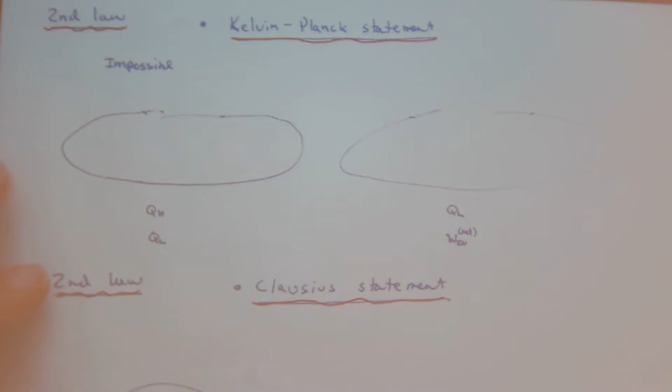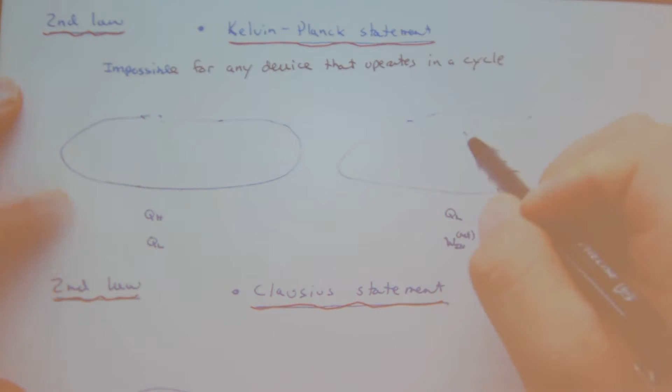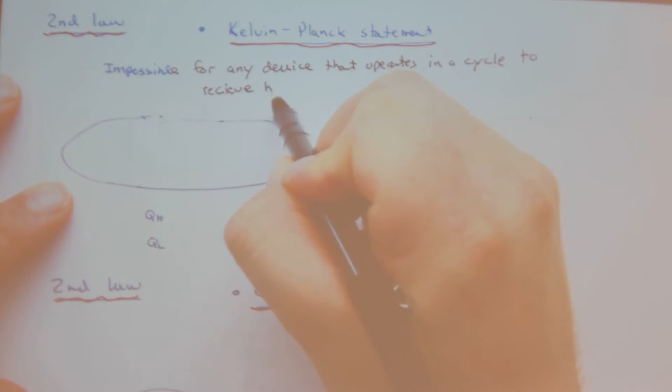So the Kelvin-Planck statement is: it's impossible for any device that operates in a cycle to reduce or receive heat from a single source and do work.

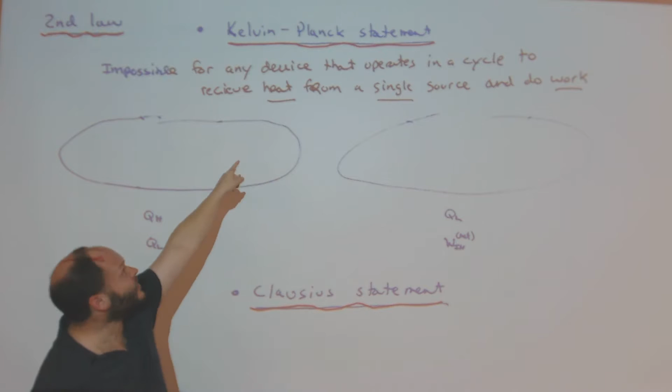So in all those schematics, we had a sink and a source, right? We just didn't have the volcano and then our system producing energy, right? We had to reject some of the heat. It's impossible. So in a couple other slides, we'll go to perpetual motion machines, where they'll show that there's not a sink and a source, so it's operating in a cycle. A lot of times people look at things and determine whether they violate the second law by using the Kelvin-Planck statement. This is just a very short version to show that the second law is certainly going to be violated because you're not removing heat and adding heat. So this is to do work, right?

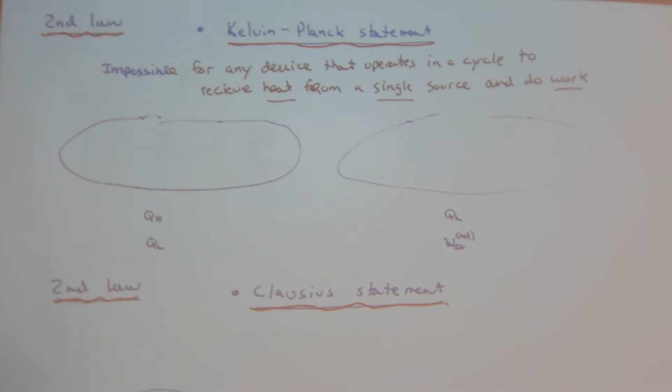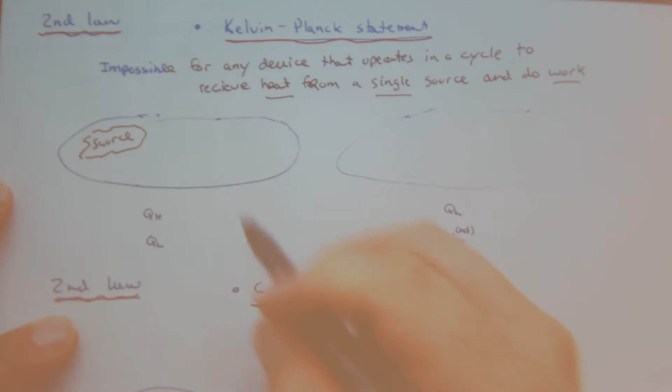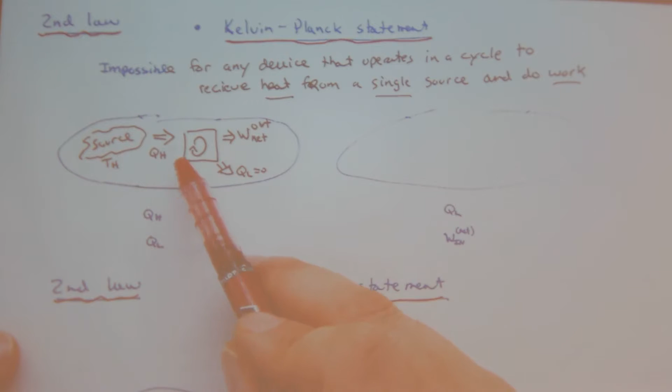So an example: I have a source which gives me QH, source at TH, and I have some system that's operating in a cycle, right? And my QL is equal to 0, and I have some work net out. This is a violation of the Kelvin-Planck statement because it's a device operating in a cycle where it's only receiving heat from one source and producing net work. So this doesn't work.

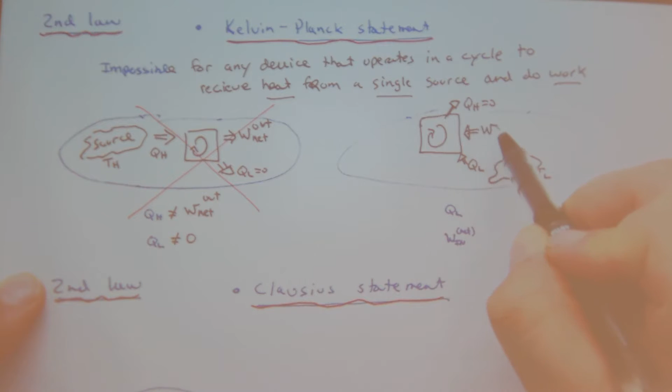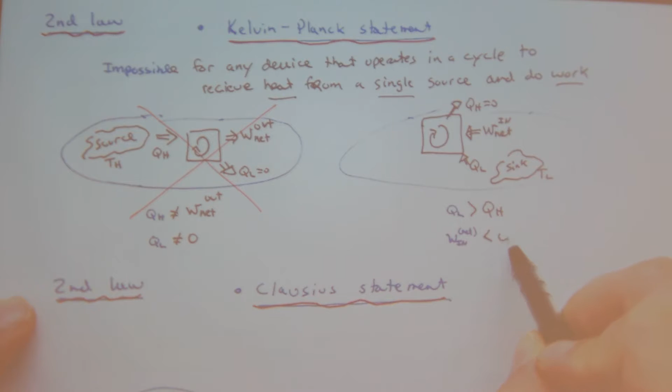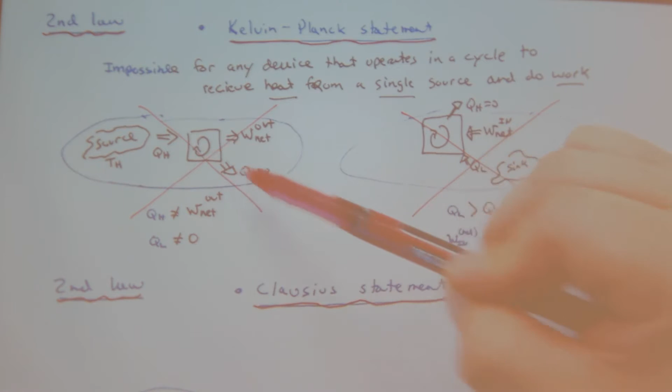So the Kelvin-Planck statement can be modified. Instead of it's not doing work, it's consuming work, but the same general terminology or concept applies. You can't just take heat from one source and not reject heat, or you can't just receive heat and not reject heat. So you have to have a sink and a source for any system to operate in a cycle.

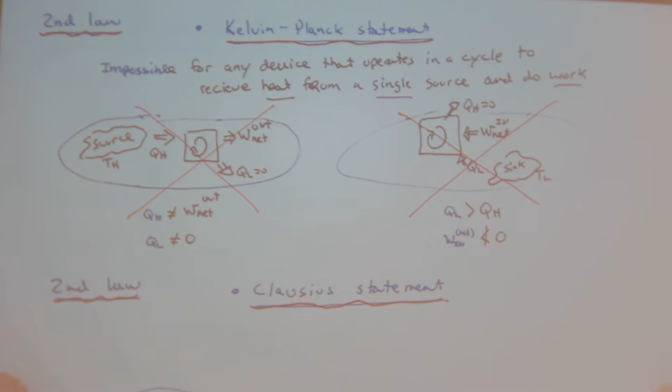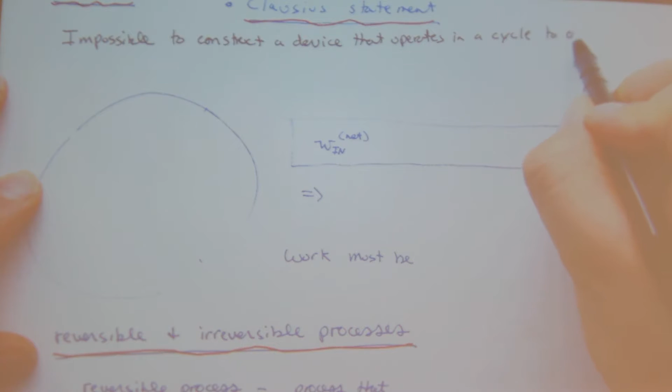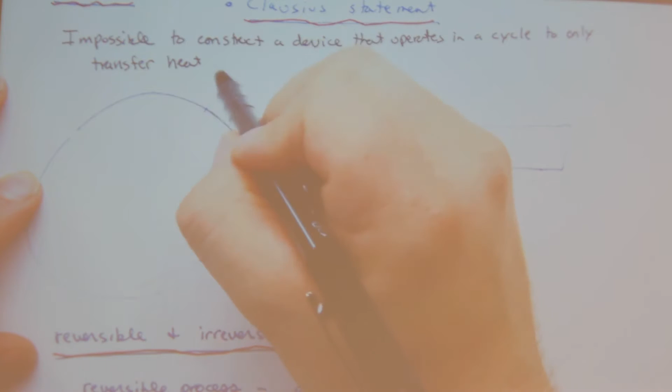So another example of a version of the violation of the second law is the Clausius statement, and the Clausius statement is: it's impossible to construct a device that operates in a cycle to only transfer heat from a lower temperature body to a higher temperature body.

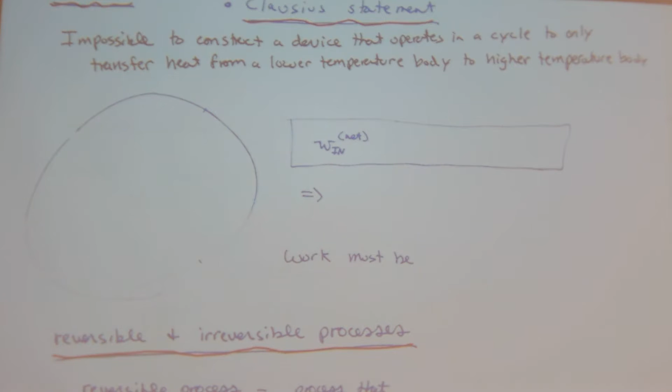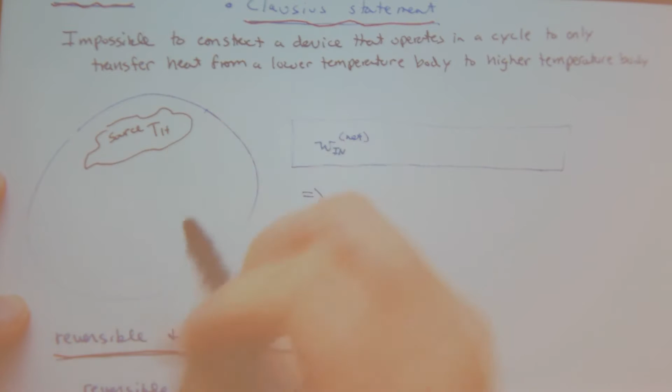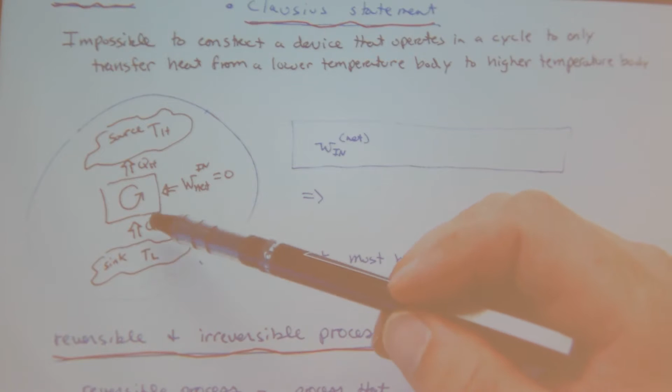So in this case, there's no work net in, right? Let's just draw an example of that. Source at TH, sink at TL. I have my system that's operating in a cycle, and I have my QL and my QH, and in this case my work net in is equal to 0. So here I've constructed a device that transfers heat from a lower temperature body, from my sink, to my source, without any energy input other than that.

So this would be - if you made such a device, we'd never have to worry about needing air conditioners, right? Because we won't need a traditional air conditioner, our house would just stay cool, right? We wouldn't need to plug them into the electric grid. We'd have this device that would just cool our house and reject to the Florida summer, right?

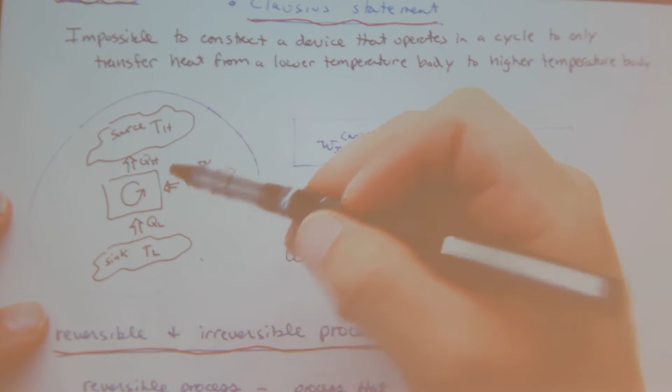So you have to have some work net in order for a refrigerator to work. And the reason for that is QH has to be greater than QL. So if we could find a way to make QL greater than QH, then this would work. But this doesn't happen. QH always has to be greater than QL.

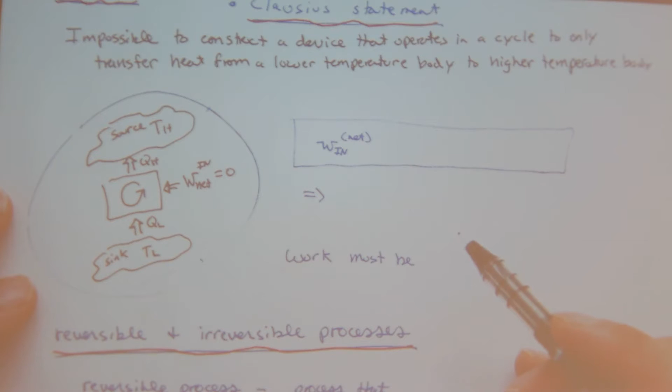Trying to think of an entropy reason as to why. So you remember the TDS statement, the TDS equation? So we can relate QH to delta S, right? TDS, right? Q, TDS equation. Q is equal to TDS, right? So here I would have a delta S associated with this, and here I would have a delta S associated with this.

And so if QH - let's just draw. Q is equal to TDS. So if I have QH and TH, so if I divide my QH by TH, I have a delta S. And if I were to do the same thing here, QL over TL, there would be a difference in delta S, in the change in entropy. And so from this example of the second law, you can show that QH has to be greater than QL because TL is less than TH.

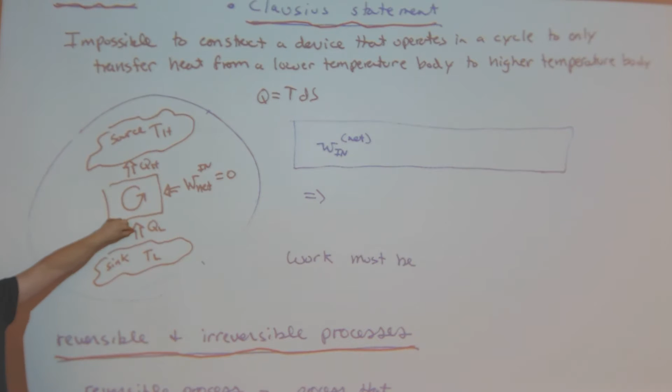Right? Because my delta S on both sides has to be equal. Otherwise, it can't be working in a cycle, because then my system would be constantly increasing in entropy. And at some point its entropy would increase and increase and increase, and then what?

Maybe that's not the best example, I just thought of it a second ago. But anyways, okay, so work net in has to be greater than 0. Not greater than or equal to 0, greater than 0. This must hold.

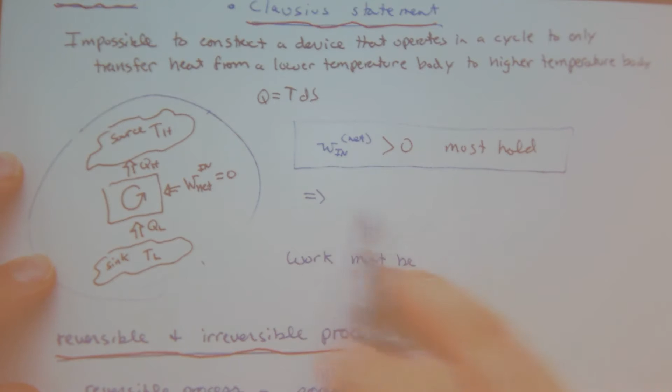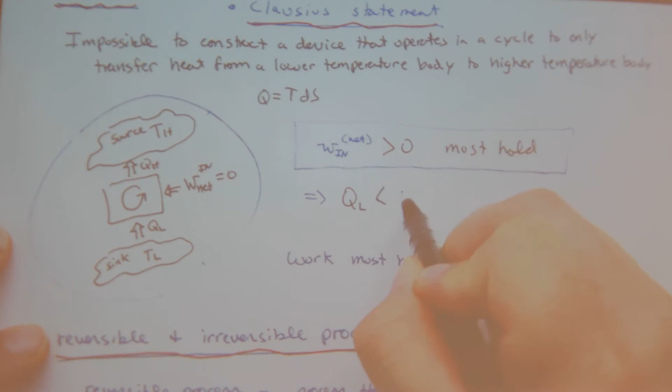So this is a shorthand version of the Clausius statement: in order for a refrigerator to work, you have to put work in. And still QL must be less than QH. This must hold too.

Or work must be done on the system by an external source.

So just some basic definitions. A reversible process is a process that can be reversed without leaving any effect on the surroundings.

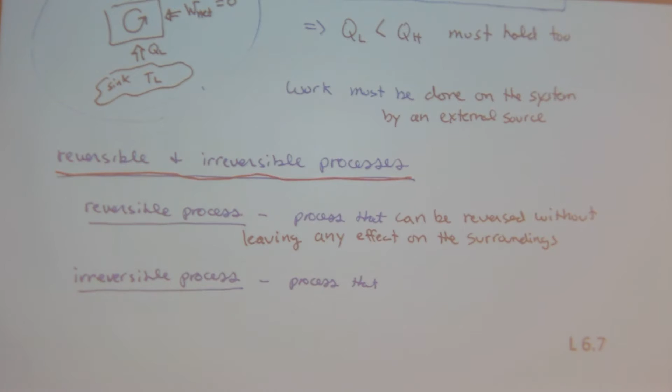So what would be... wouldn't anything have some heat loss? So wouldn't that always affect the surroundings?

Yeah, so this is kind of a hypothetical, right? Reversible process is more or less hypothetical. In principle, it can happen, right? You can have only reversible heat.

So let's just say I want to use a balloon... but maybe that's not the best one. If there's a balloon, well, that's not it. I'm trying to think of some way, but so we used that circuit example earlier on where we had a circuit and a battery, and then the battery got current running through it, which generated heat, which heated the gas surrounding it.

So if all that heat that went to the gas was reversible, then the gas could give back heat to the circuit and recharge the battery.

But of course, there's no such thing as that. Well, if we had it in a certain way, there's no way to make the heat charge a battery like that. But nevertheless, it's the fact that if I could give heat to the gas and the gas could give equal heat back, so it was all reversible heat, then if I asked every gas molecule, they wouldn't know that they had just received heat and gave it away.

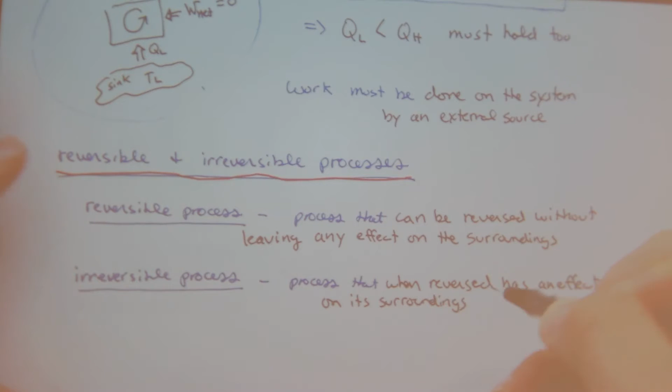So, me moving in this room, I can go from this state to this state and then come back again. The reality is, even though I come back and forth, I move the air molecules around. The air molecules know that I moved.

So if I add heat to a gas and then subtract the same amount of heat back, the gas is always going to know heat was added, even if I remove the exact amount, because it's going to be vibrating a little bit differently. I'm going to change the distribution of velocities in the gas. It might be at the same average temperature and pressure after, but it's going to know that something happened.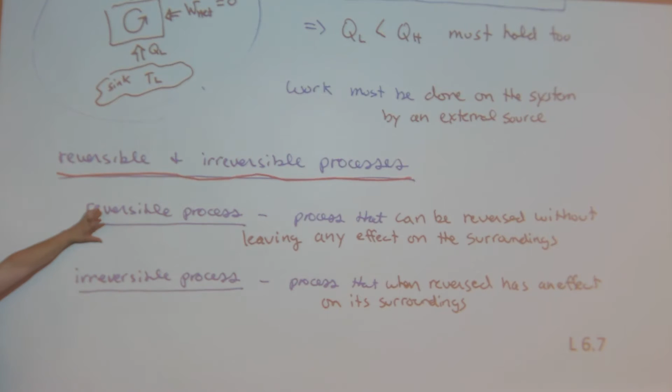And this is what happens in practice for any type of system or device you make. The goal as an engineer is to make it as reversible as possible, because when you make it as reversible as possible, you minimize the amount of irreversible heat, which means you minimize the effect on the surroundings.

So the last thing I want to do related to this is go over some examples of perpetual motion machines. These are in the back of the book, or in chapter 6. So here's an example of a perpetual motion machine where I have a pump.

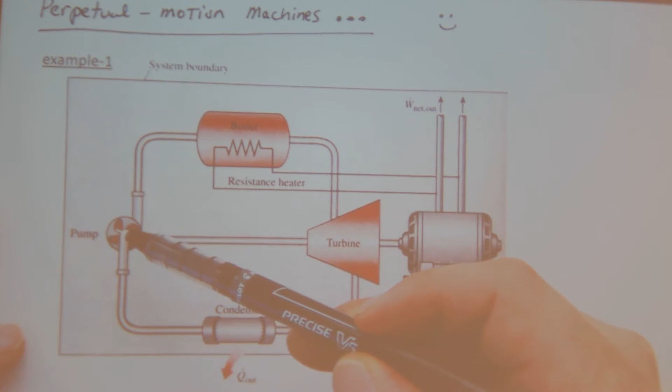You can see I have no work input to the pump. The pump is pumping, and the turbine is actually turning the pump. So my boundary, there's no external work input to this, but I have some work output.

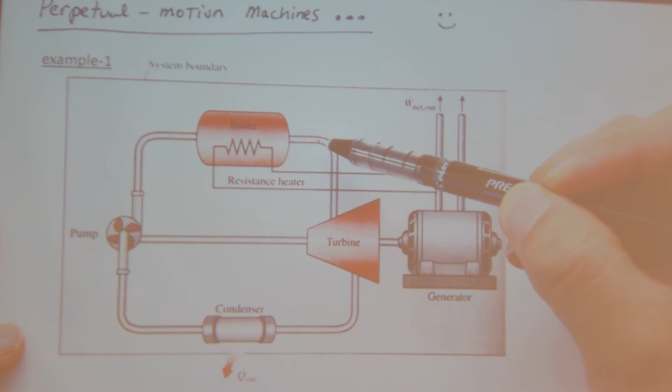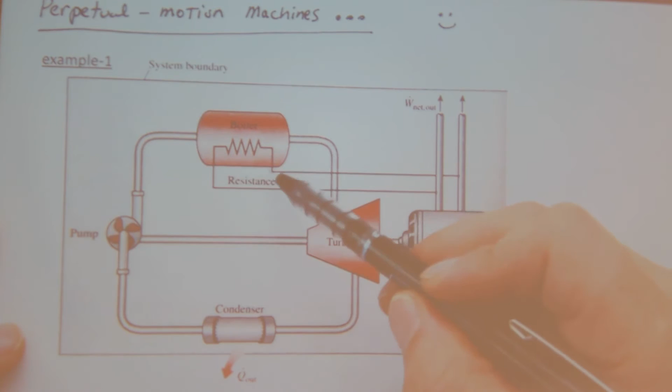There's a boiler, a resistive heater. I take in some liquid, high pressure liquid, still in the liquid state. I create it into a superheated vapor, a higher energy liquid, which then goes to the turbine. The turbine takes that higher energy fluid, reduces its energy, and gets a work output. Some of that work output from the turbine goes to the generator and to the pump, powering the pump. The generator then creates electric power, which powers the resistive heater through the boiler, and then the condenser just rejects heat out to my lake.

And so I have this thing which gives me a net work output by only rejecting heat to my low temperature source or sink.

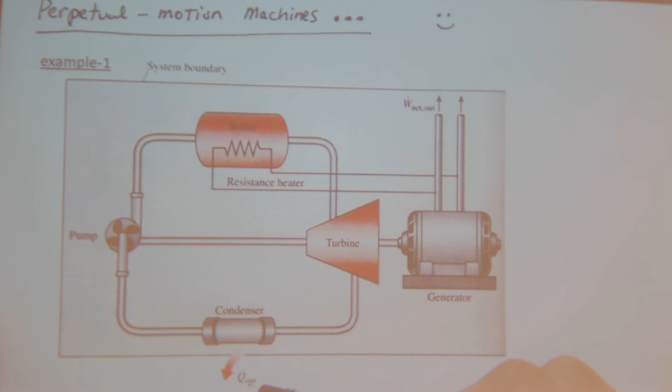So this is a violation of what statement? There's no heat in. So it's a violation of the Kelvin-Planck statement. You can have work out, so if this is net work out but there's no work in, I guess it's a violation of both statements. But in general, I need some heat from a high temperature source.

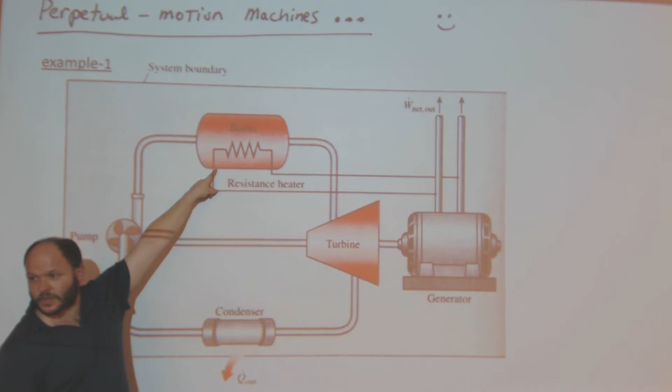So I need some heat input. And so what laws does it violate? Does it violate the first law? If I do an energy balance on this, it does?

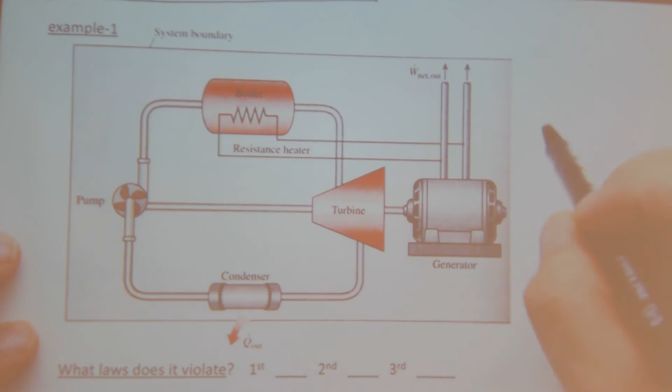So let's just write it out. All my forms of energy in are 0, right? So there's no heat or work. Energy in is equal to 0 minus energy out. So what are my forms of energy out? Q out and work out. Yep, Q out plus work out, and it's net. So whatever, I have that equals delta U.

Okay, I can put dots above this because I have a cycle system. So let's just put dots above it. So whatever, it's 0. So I have Q out, net work power out. And then I'm operating in a cycle, whether I just make it one cycle and have a delta U, or have it working at steady state, this is equal to 0.

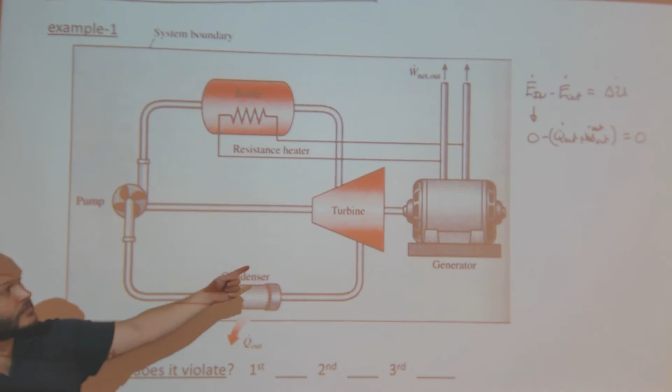So does this violate the first law? Yeah. Do I have balance? No. So minus Q out equals work out net.

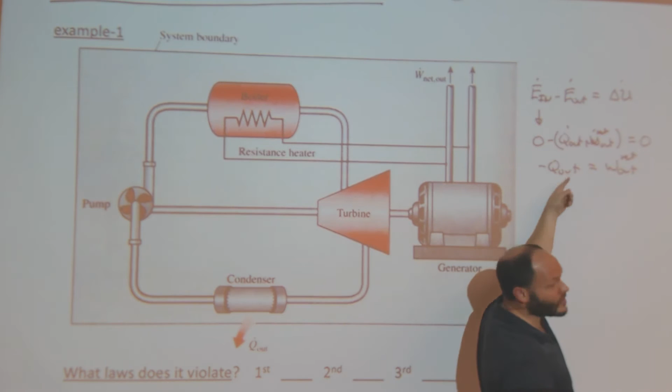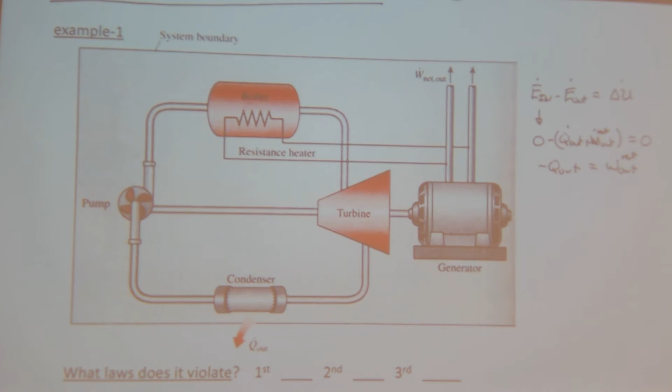So I guess it would mean that this has to be Q in, in order for it to be right? So I guess it does violate, because I've defined that as Q out. So in this respect, it would say that this needs to be Q in. But then if this is Q in, because minus Q out is equivalent to Q in, so Q in equals work out. So yes and no, it violates the first law. So we just defined this wrong. So I guess it violates the first law, because there's not balance. So yes.

How about the second law? Does it violate the second law?

We know we can use those Kelvin-Planck statements to say, oh yeah, it violates the second law. That's a good thing to do as an engineer, to know those statements to see if it violates the second law. But there's another way we can do this. We automatically know it violates the Kelvin-Planck statement because it needs to take heat and remove heat to two different things. You can't just do work by only rejecting heat or receiving heat. You have to reject and receive heat to do work. So it's yes.

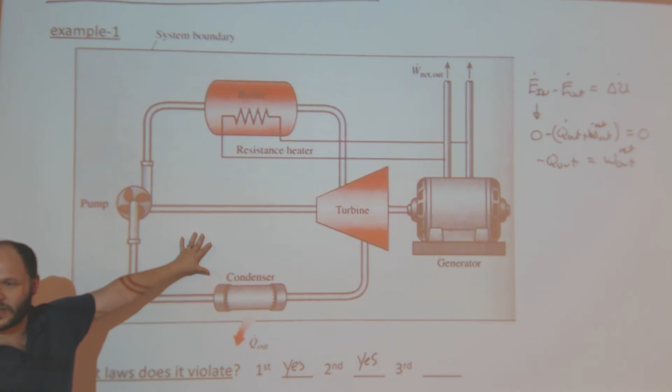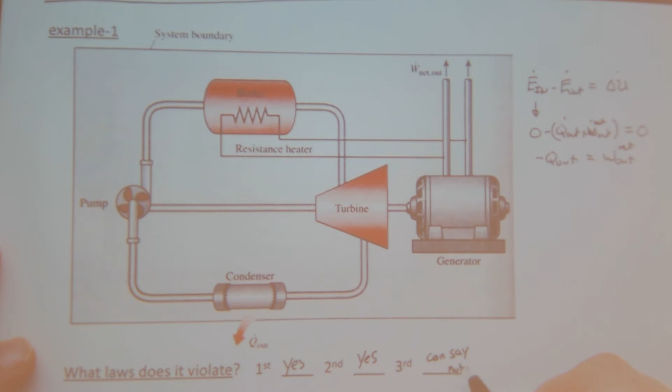How about the third law? Does it violate the third law? No, since that just has to do with S approaching zero as it approaches absolute zero. It's hard to do because this isn't a homogeneous system in complete internal equilibrium. So we can't really say whether it violates the third law because this is a multi-component system, not in complete internal equilibrium, so it's really hard to justify. It's not homogeneous. So now let's relate this to the second law.

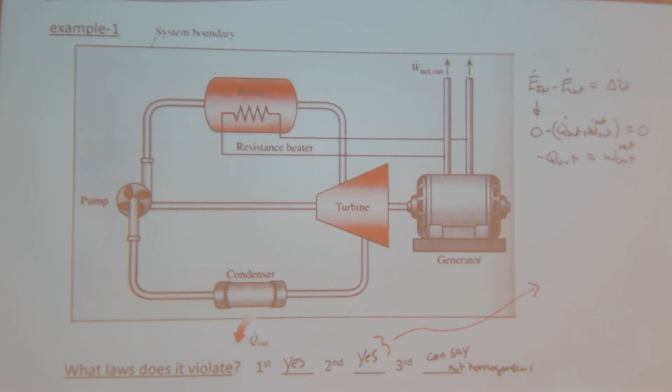Another thing we can do is what is called entropy balance, and this is the last slide on chapter 6, so I'm transitioning into chapter 7. What I'm going to write down is entropy balance, which is the foundation of seeing if something violates the second law. Just like we had energy balance, where energy in minus energy out equals the change in internal energy in my system, and I can put it in rate form, I'm going to have something similar where entropy in minus entropy out plus entropy generated equals delta S system.

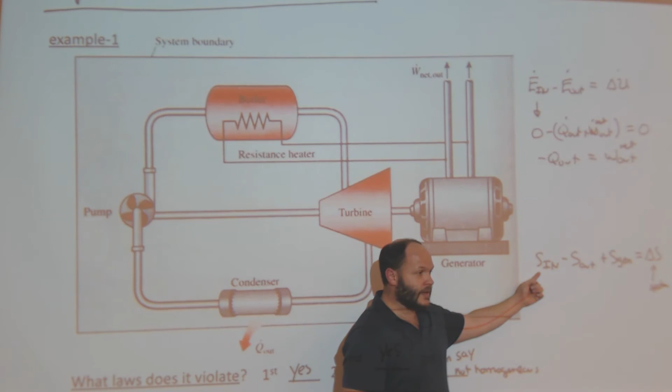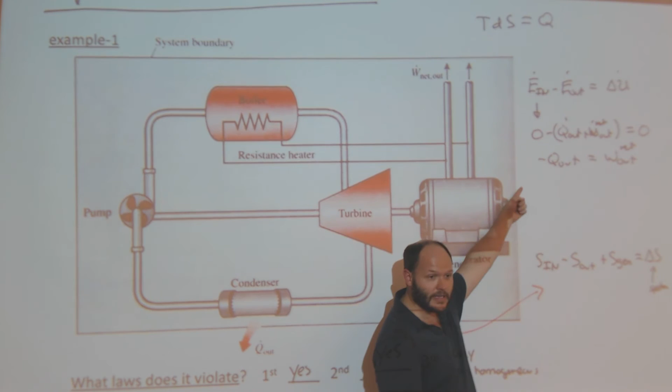Now, remember how energy in can be in the form of heat, work, and mass? Entropy in has a contribution due to heat, which I can write real quick. So you can see right away that entropy is coupled with heat. Entropy has a heat and a mass contribution, but no work contribution. And just like entropy out has a heat and mass, no work. So with energy in, I had heat, mass, and work forms of energy. With entropy, I can have a contribution due to heat and a contribution due to mass, but there's no entropy contribution due to work. Work is external. Work changes the heat and mass, but there's no form of entropy associated with work.

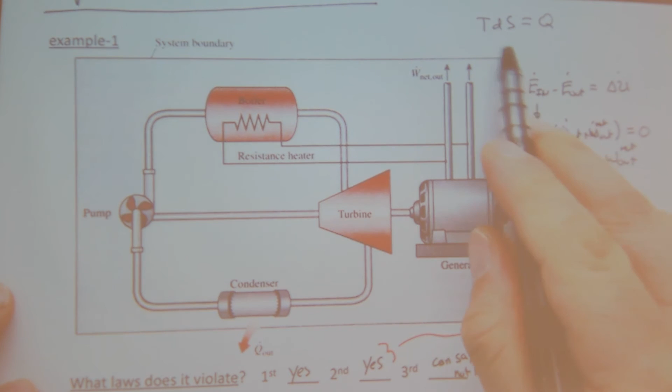So in regards to this picture here, what do I have for entropy in? Let's put dots above it for rate form. What heat or mass do I add to my system? No heat, no mass, right? So my rate of entropy due to heat and mass coming in is 0. I'll write heat and mass up here, and so this is 0. And then for entropy out, all I have as an output is Q dot out, and using Q dot out over T_B, where this is my boundary temperature, so I have a minus Q dot out. My entropy associated with the heat leaving, straight from that, so I have a minus. And then there's no mass leaving.

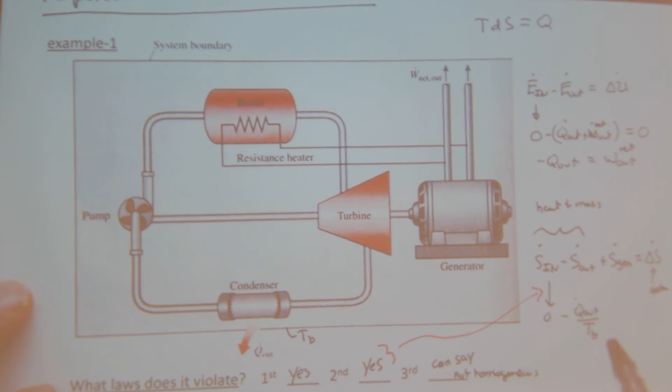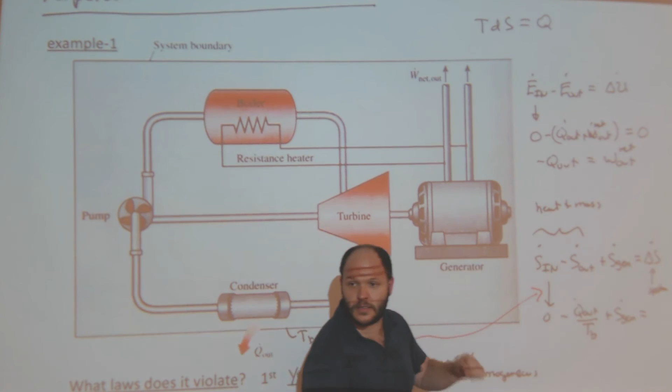So it's that plus S gen dot equals what? This is a perpetual motion machine, so it's supposed to be working at steady state. So what is this? 0. Right, it's working at steady state. It's a perpetual motion machine, or a perpetual work-producing machine. All I do is get the fluid moving, which then heats it, runs it, generates power, and then provides some of the power out to keep it moving, and I'm constantly providing work out. So it's a perpetual power output machine, and it's working at steady state. And just like in energy balance, when something's working at steady state, my delta U dot is equal to 0 at steady state. The same applies during entropy balance.

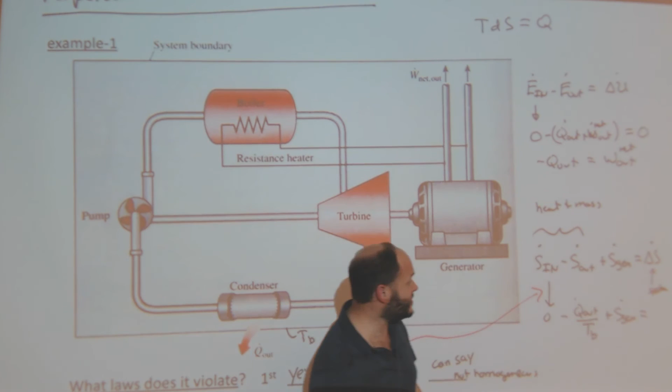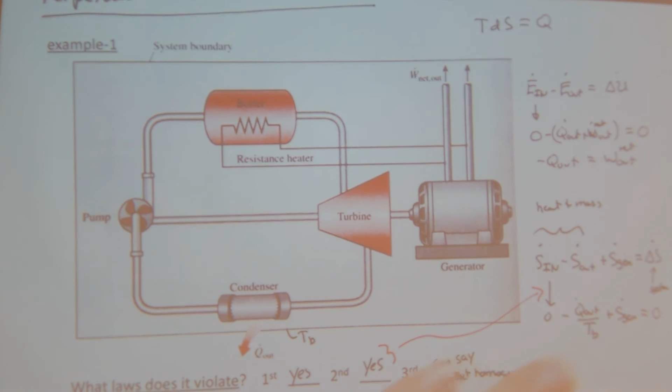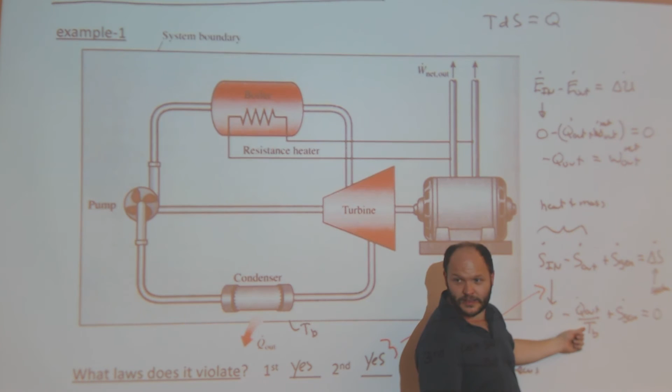So then I have S gen dot equals... but from energy balance, we saw that this has to be actually Q in, so this is a negative value when we did this. So let me just write it out. S gen dot equals Q out over T_B dot, but then this is actually not true, it's actually minus... so from here, this is work net out, so I have minus work out dot over T_B.

There's a dot above that. So my rate of entropy generation is a negative quantity. And so this thing, just like how we wrote the second law where delta S has to be greater than or equal to 0, this has to be, whether it's S gen dot or S gen, this has to be greater than or equal to 0.

So we can see by combining energy balance with entropy balance that this is a violation of the second law. Now, of course, I jumped way ahead and introduced this whole idea of entropy balance. But this is what you're gonna be tested on throughout the second exam and the final more than anything. So...

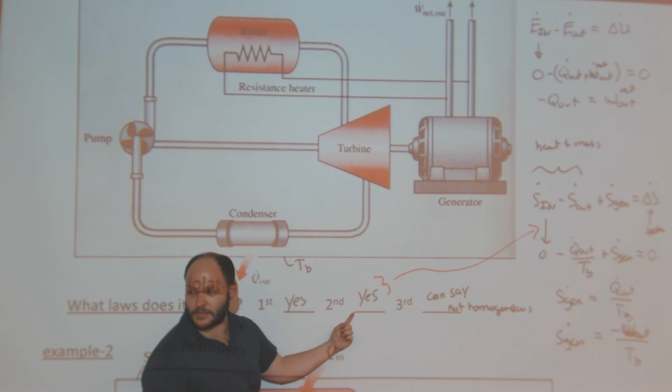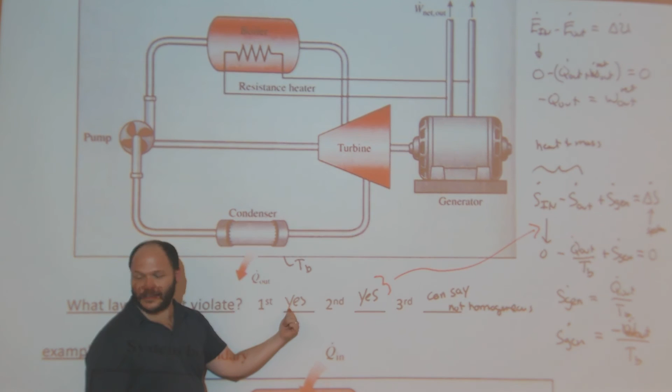We'll be working on these concepts the rest of the semester. But this is just here, we can use the Kelvin-Planck statement or the Clausius statement to show that it's a violation of the second law. We can use the first law or energy balance to show it's a violation there, show this thing doesn't work. Or we can go through a full entropy balance coupled with energy balance. Of course, we didn't even need to do this after here, but we might have had a scenario where it wasn't violated for energy balance, and then once we do this, we find out it was. But then we apply this, and then we get a relationship.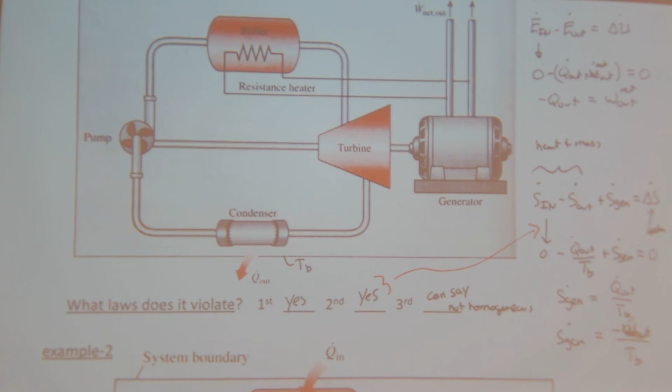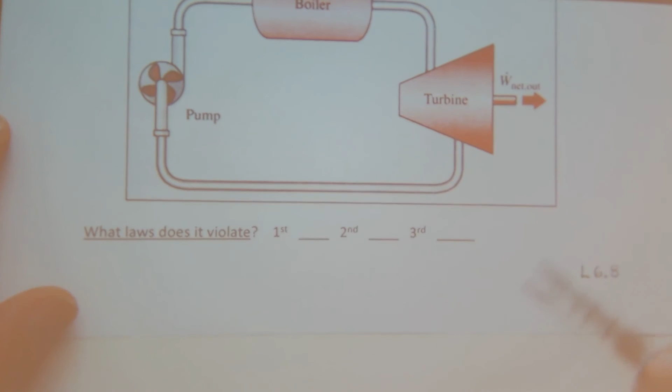Okay, so the last example. So now I have this work producing device, and I have Q in, and now the pump is just pumping. I don't know how. There's no power from the turbine to the pump, and it's coming through, and it's saying I constantly have work output. So I could have Qn. So when I do this, I have the same equations as I had before for this, but now I have Q in equals work net out. So if I do energy balance, I'm going to end up getting Q in dot equals work out net.

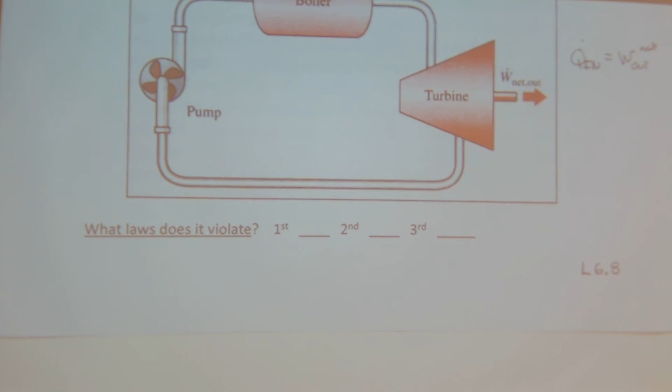So this example here, I just did energy balances. It doesn't violate the first law. I'm adding heat and I'm getting work out, an equal amount of work out relative to the heat I add. So it doesn't violate. So no.

Does it violate the second law? Well, I can use the Kelvin-Planck statement and quickly identify that I'm getting work done by only taking heat from a single source. So just from the statement, I can say yes, it violates the second law.

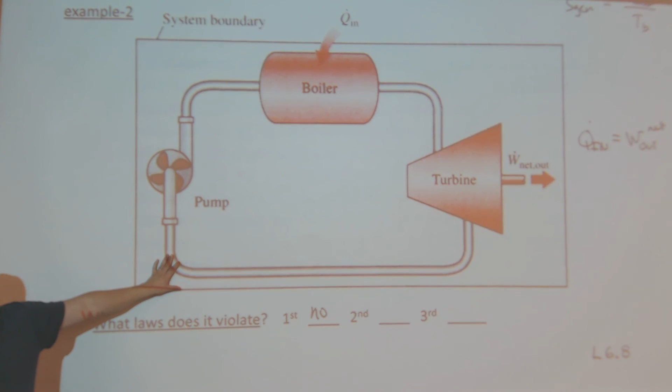Or I could go through an entropy balance and show it. And so let's just do the entropy balance, right? So yes, Kelvin-Planck statement. So how about entropy balance?

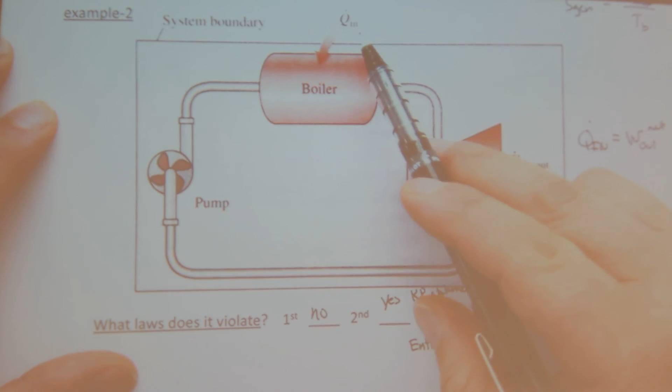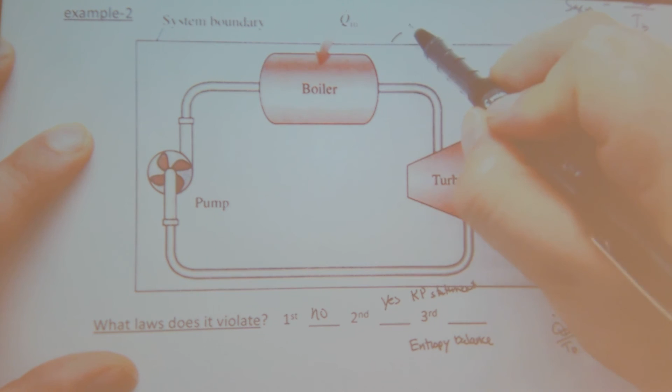So let's do it. S in dot minus S out dot plus S gen dot equals delta S dot, and I'm working in a cycle, right, at steady state. So we're going to say that this is 0, and S in, I only have one form of S in, and that's due to heat. So then I got Q in dot over some boundary temperature, TB. I have no entropy out, so this is equal to minus S gen dot, or I can turn it around, minus Qn, right? So that means minus work out over TB from there. But nevertheless, I have a negative, I have S gen equals a negative.

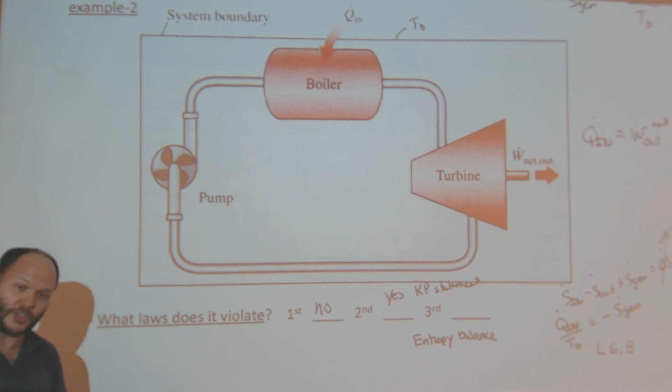So again, by doing energy balance, I can quickly see, using the Kelvin-Planck statement, or I can go through a full entropy balance, and then I find that this S gen dot, the rate of entropy generated by my process, is a negative number. So I'm actually decreasing entropy as it works. So in principle, this thing drives entropy to absolute 0. So in some ways, this device will bring my system to absolute 0 by adding heat, because the entropy only approaches 0 at absolute 0, right? The net entropy. So this system not only violates the second law, it says that by adding heat to a system that produces work out, I'm going to bring it to absolute 0.

Okay, I think it's interesting, but anyways, okay.

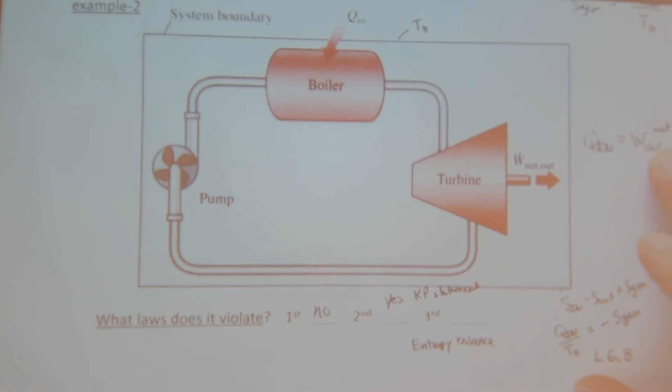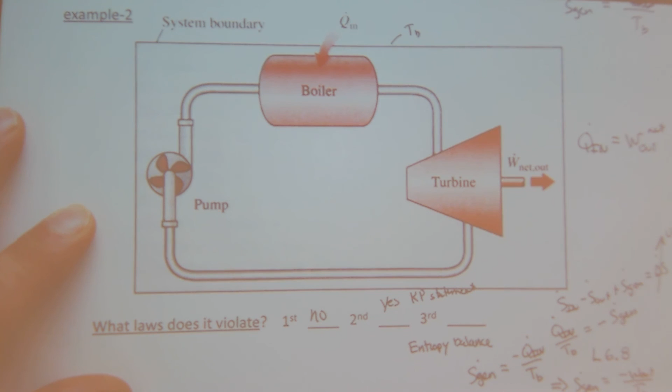Let me just write this out the better way. So S gen dot equals minus Q in dot over TB, which then implies S gen dot equals minus work out dot over TB. So we already know that the work out was defined to be a positive value. Of course, temperature is a positive number. So my S gen is a negative quantity. My rate of entropy generated is actually, so that means I'm decreasing the entropy.

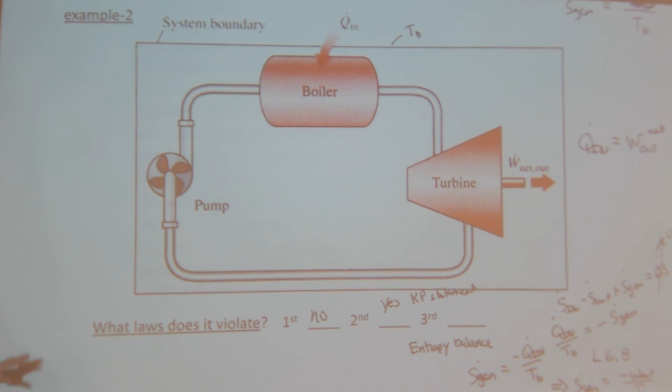So yes, through entropy balance, third law, cannot.